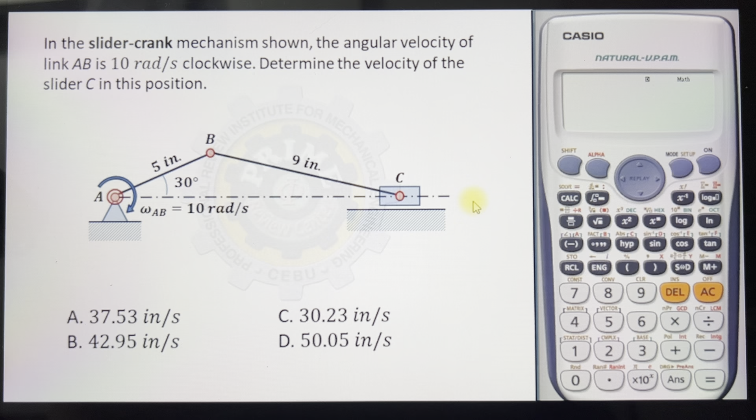Now there are numerous ways of solving velocities when it comes to mechanisms, but what we're studying now is one of the quickest and easiest ways of analyzing velocities: vector resolution and composition.

Let's say for example we have here a solid body, and let us consider 2 points within this body, point A and point B.

Now if for example this is a worded problem and the scalar and direction of velocity A is given, so we complete our data on velocity A. And if we also know the direction of velocity B - let's say this is the direction of velocity B - but the exact value of velocity B is not given. We only know its direction, but we don't know its scalar.

Now with the resolution and composition of vector velocities, we can compute the velocity of B. How? The first step is that you have to draw a line connecting these 2 points being considered.

This point that we're considering - so from point A, going to B. Now the second step is we do the composition.

How do we do that? We get the component of velocity A with respect to this line that we have created. How? From the tip of VA, we will draw a line perpendicular to line AB. So like this. And you'll see the portion of VA, its shadow on line AB, that's its component with the line AB.

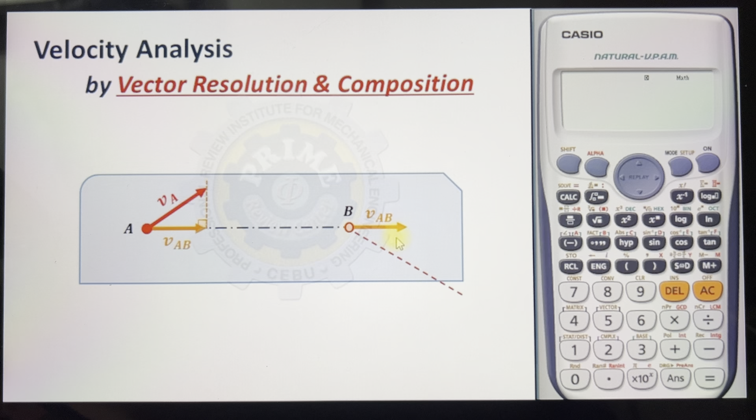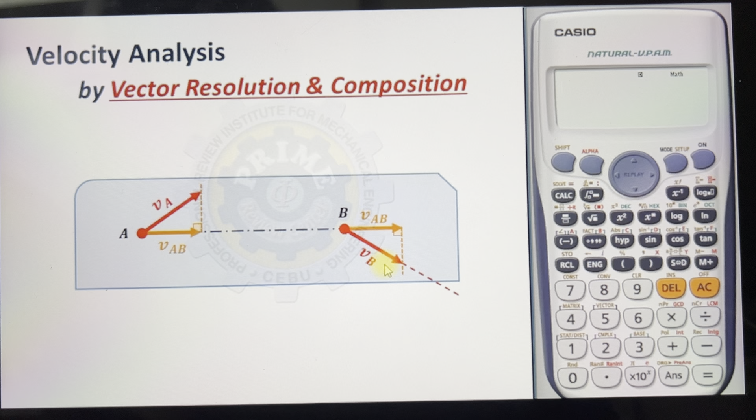Katulad ng ginawa natin kanina, gumawa tayo ng perpendicular line with respect sa line AB, ganun din dito. From the tip of VAB, gagawa tayo ng perpendicular line. Since we know the direction of velocity B, itong kulay pula, ang intersection ng perpendicular line at ng line of action ng velocity B, yun yung magiging length ng vector natin. So from point B papunta doon sa intersection, that's velocity B. At sa ganon, masosolve natin ito.

Okay, so let us apply. Balik tayo doon sa ating crank slider mechanism. Alamin muna natin gaano kabilis umiikot itong AB. Binanggit, that's 10 radian per second.

Ang motion mula dito sa link AB ay ipapasa niya dito kay link BC at saka ipapasa sa slider. Mahalagang malaman natin gaano kabilis itong velocity B. First things first, alamin na itong velocity B ay tangential velocity, at laging perpendicular ito sa radius nito. Kung umiikot siya with respect to this fixed axis A, naka-perpendicular siya doon.

At ito yung kanyang radius, 5 inches. Paano kinocompute ang velocity? Given angular velocity, we have discussed it already before sa mechanics, so we have angular velocity times radius. Both are given: angular velocity is 10 times the radius, 5 inches. Hindi na natin kailangan i-calculate yan. 10 times 5, that is 50 inches per second.

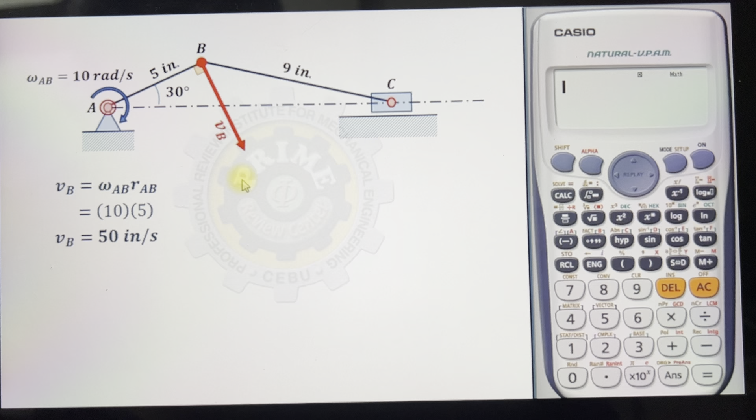So this is 50. Ngayon, para malaman natin velocity C, ang unang step sa ating method ng resolution and composition, una ay kailangan gumawa ng line connecting your points of consideration. Ang consideration natin dito ay point B and C, kasi dyan mangyayari yung transfer of motion. Hindi na pala natin kailangan gumawa ng line kasi meron nang line.

Ito na nga. Ang next step ay kailangan i-compute yung component ni velocity B dito sa line BC. Paano ginagawa yon? By drawing a perpendicular line from the tip of VB hanggang doon sa line BC. So ito yun, at mula dito sa point na ito papunta doon, that's VBC. At yan ang ililipat natin dito mamaya.

Pero alamin muna natin, ilan ba yung value nito? Kung mapapansin mo, meron tayong buong right triangle dito. Mahalagang malaman natin itong angle. Paano yun? By using geometry, magagawa tayo ng vertical line dito. If this is 30 degrees, this is also 30 degrees. Ginawa na natin ito sa static, so assume na nakuha na natin.

Pero puwede ring gamitin yung medyo mahabang solusyon ng geometry. Pero for shortcut, kung ano yung angle nito, yun din dyan. At kung ano yung angle na ito, tawagin natin theta. If this is theta, dito naman sa kanan, this is also theta. Kaya mahalagang malaman natin itong angle.

Paano yun? Let us consider the whole triangle, itong triangle na ito, at gamitin natin ang sine law. So 5 over the sine of the opposite angle equals 9 over sine ng opposite angle. 5 over sine theta, yun yung opposite niya, equals 9 over sine 30. I-type natin sa calculator: 5 over sine alpha x, equals alpha equals, then fraction, 9 over sine 30 degrees.

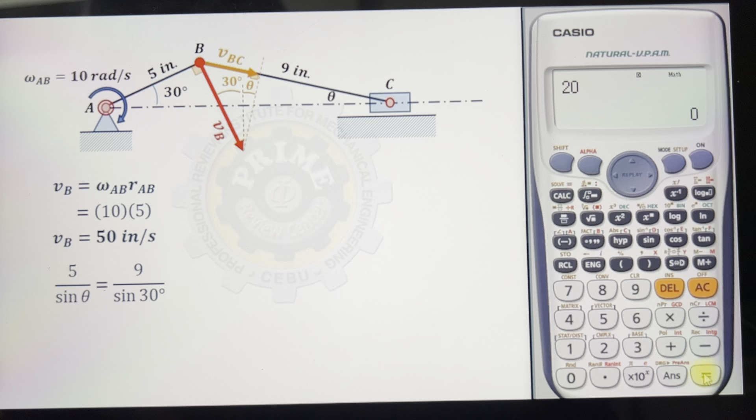Tapos shift solve. Siguro lagyan natin ng 20 para mapabilis, nagsusuggest tayo ng value sa calculator. So theta is equal to 16.13 degrees.

So if this is 16.13 degrees, we can now do trigonometry para masolve ang VBC, using sine. Yung VB times the sine of 30 plus theta, makukompute natin itong VBC. Direct substitution: 50 is VB, sine 30. Sa calculator: 50 sine of 30 degrees plus 16.13, press equals, we have 36.05 inches per second. So we now have VBC.

Itong VBC, dahil itong point B at point C ay nasa same body, kung yan ang value ng VBC dyan, ganyan din kabilis ang VBC sa point C, ganun din dito. Naililipat yun dyan. Ngayon, ang susunod na gagawin natin ay resolution.

Ito ang ginawa natin dito, composition. Dito po, resolution. Okay? Just like what we have done here, na gumawa tayo ng perpendicular line to line BC, ganun din po dito. From the tip of VBC, gagawa tayo ng perpendicular line.

Ayan. And since we know the direction of velocity C, alam na alam po natin ang direction ni velocity C. Itong horizontal, kasi slide po yan, magi-slide lang yan eh. So from point C up to the intersection ito, that's VC. Okay, so makikita na natin si VC, velocity C.

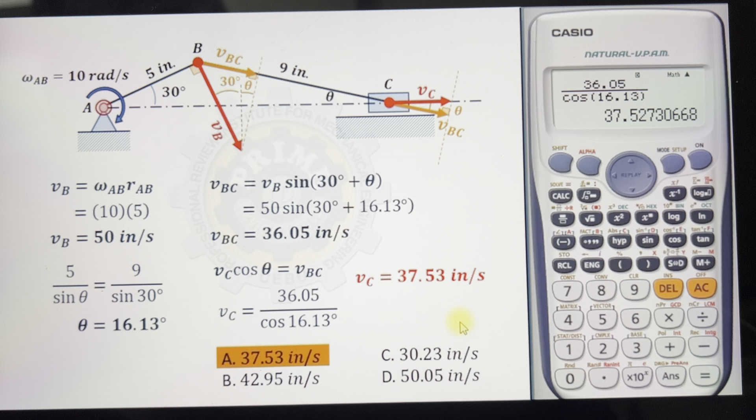I hope nasundan nyo po itong resolution and composition of vector velocities.

The velocity of slider B at the instant shown in the mechanism below is 12 feet per second. To the left, determine the direction and scalar of velocity A. Okay? Ito po nakikita nating mechanism ay isang link tapos dalawang slider.

No? So sabi ng problem, ito pong slider B ay mag-i-slide to the left papunta dito. At 12 FPS ang speed. So of course, by logic, ito pong velocity A ay pataas, upward. So sa choices, it's obvious, it's either C and D.

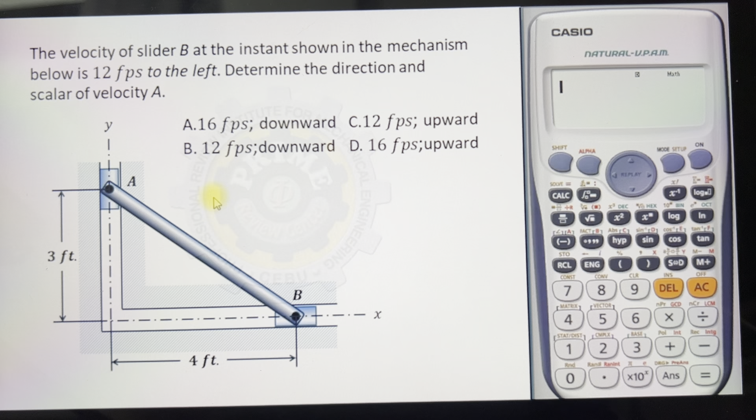Kaya lang, ano yung value? Yun ang gusto nating malaman, no? Paano po ito kino-compute? Okay? We have one of the ways po ng pagko-compute ng velocities in mechanisms, no?

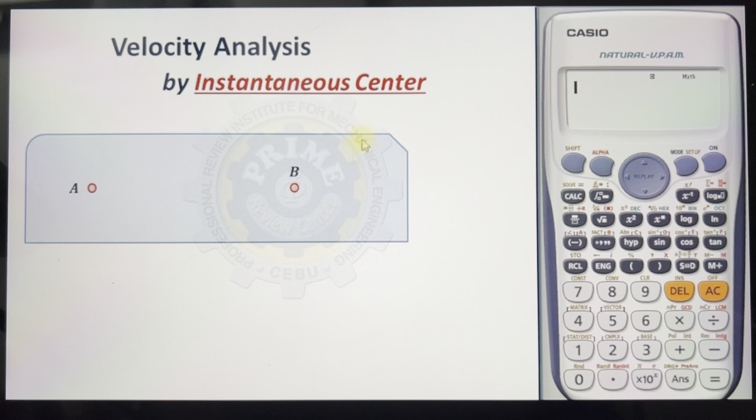When it comes to kinematics, ito pong paggamit ng instantaneous center or IC. Paano po yung ganito po, no? Since let us say for example, we have a body, no? A rigid body. And let us consider 2 points in this body, let us say point A and point B.

At sabihin po natin alam natin yung velocity A. It's a scalar value at saka direction. And then sabihin po natin alam din natin yung direction ni velocity B. Okay? But gusto natin malaman yung value niya. Paano po yun? Okay, ganito po.

Ang ginagawa natin, hinahanap natin yung instantaneous center o yung instant center. Okay? Ina-assume po kasi natin na ang isang body ay pag gumagalaw, kagaya po niyan, may posibilidad na umiikot po siya at a certain point. Paano yung ganito po, no?

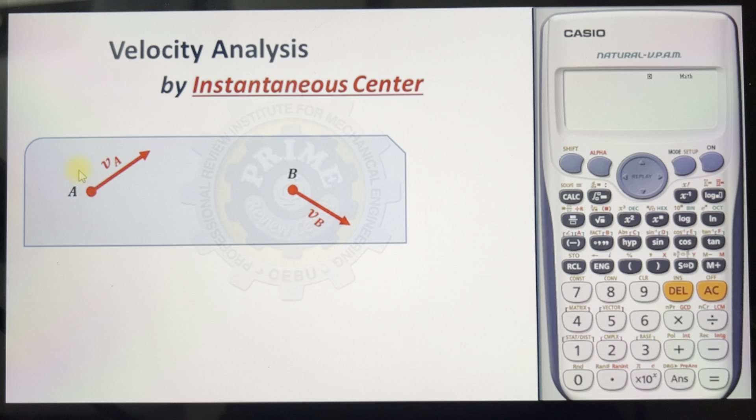Ang first step ay gagawin po, gagawa ka lang ng mga lines, mga perpendicular lines. Paano? Ganito. Halimbawa, velocity A. Magdodrawing ka ng perpendicular line. A line perpendicular to velocity A. Okay? Tapos habaan mo, extend mo. Ayan. Okay? Tapos itong velocity B, with this direction, gagawa ka naman po ng perpendicular line din.

A line perpendicular to the direction of VB. Ganito po. Ayan. Tapos extend mo rin. Ngayon, kung saan po sila mag-i-intersect, kagaya yan, dito po nag-intersect, okay, yung point na yan po yung tinatawag natin na instant center or instantaneous center IC.

Okay, ang ibig sabihin po kasi yan yung point kung saan itong buong body na to ay umiikot, no, seemingly turning around this point at this very instant lang. Kasi po, pagka gumalaw na yan, naiiba yung pwesto ng IC. Nagalaw din po yan. But kaya nga po tinatawag na instantaneous center. At that very instant lang. At this very instant. Okay.

Now, ano po yung meron? Ganito po, no? Sa pamamagitan ng pag-identify kung nasaan ang location ng instant center, napapadali po yung pagsosolve natin, napapaigsi, no? Yung pagsosolve ng velocities ng mga points na kinoconsider.

Okay, paano? Ganito, no? Alam natin na Kung halimbawa, ito po ay may angular speed, W. Alam po natin na ang pag-compute ng velocity ay WR, yung tangential velocity. Halimbawa, ang radius po nitong velocity ay from IC RA, tas ito ay RB. Para mo-compute yung VA, WRA. Yung W tina-times sa RA, W times radius, nakukuha mo yung velocity.

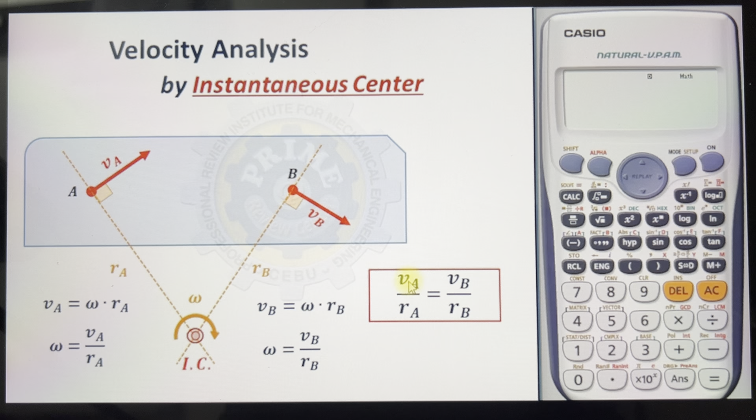They are turning at the same angular speed. We can equate this, no? Ibig sabihin, meron po tayong ganitong ratio and proportion. Pagka na-identify natin yung location ng instant center, sobrang dali dahil magre-ratio and proportion ka na lamang. Hindi na natin kakailanganin pa yung mga components, yung x component, y component ng mga velocities. Wala na, ratio and proportion na lang, ng velocities and radii. Okay, paano?

Ganito, balikan po natin yung problem kanina. Sabi ng problem, si slider B nag-i-slide to the left with a certain given speed. Of course, by logical reasoning, ito po aakyat pataas. Siyempre, imposible bumaba yan, kung bababa yan, mababali itong AB. So, pataas talaga yan, okay?

Now, we have to find first yung location ng instant center. Paano nakikita yung IC? Ganito, magdodrawing ka lang ng line perpendicular to the velocities. Halimbawa, itong velocity B, naka-horizontal, so ang perpendicular dyan vertical. Tapos habaan mo, extend mo. Tapos itong velocity A, since ito ay naka-vertical, ang naka-perpendicular dyan is a horizontal line. And then yung intersection ng mga lines na yan, ito yun. Yan ngayon yung instant center.

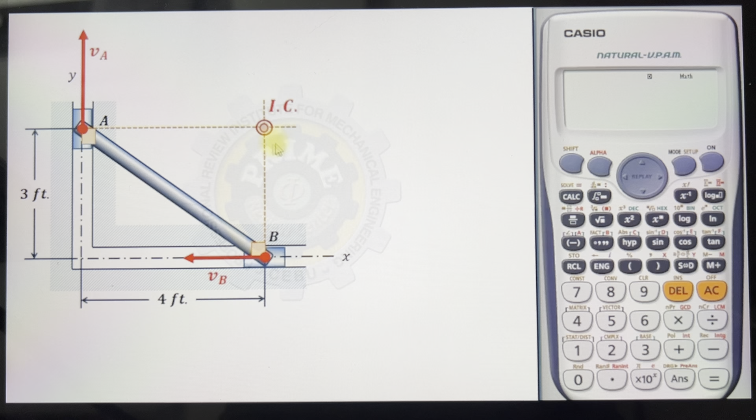Okay, remember, kapag may instant center na tayo, magre-ratio and proportion na lamang tayo. But dun sa ratio and proportion, mahalagang malaman po natin yung mga radii, mga radius. Halimbawa, itong si A, ang radius niya, distance yung from point A up to IC, ito po yung RA. Tapos yung RB naman ay distance from point B hanggang dun sa IC, this is RB. At ito nga pong IC, ina-assume natin na at this very instant, itong link AB, pati yung mga slider are turning, seemingly turning at this point, at this very instant, with this angular speed. Okay, so paano yung ratio proportion?

Ganito po. Velocity A over radius A equals velocity B over radius B. Okay, so given yung velocity B, 12 fps. How about radius B? Kung titingnan natin itong radius B, ito po ay 3 feet, kasing haba. So RB is 3 feet. For RA, ang haba po ni RA ay 4 feet. So RA equals 4 feet.

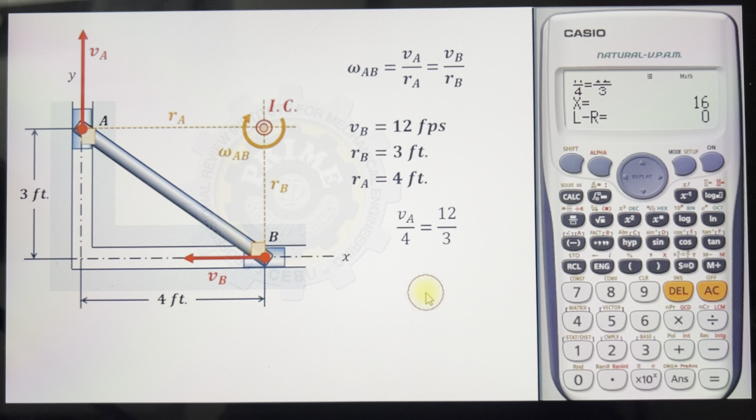Ayan, so okay na tayo. Direct sub natin dito, pwede na natin masolve si velocity A. So, velocity A is alpha x over 4, equals 12 over 3. By the way, pwede naman itong i-manual dahil madali lang, no? But sige, shift solve. Ang lalabas po, velocity A ay 16 fps. At sa choices ay letter D, upward. Ingatan po kasi mayroon ding letter A downward, but it's upward. Okay, letter D. So yan po, and I think ito po ang quickest way.

The easiest way din ng pagsosolve ng velocity, yung paghanap ng IC. Sa ibang libro, tinatawag yung instant center as the centro. Pero okay din po tawagin siya na instant center. I hope nasundan niyo po yun.

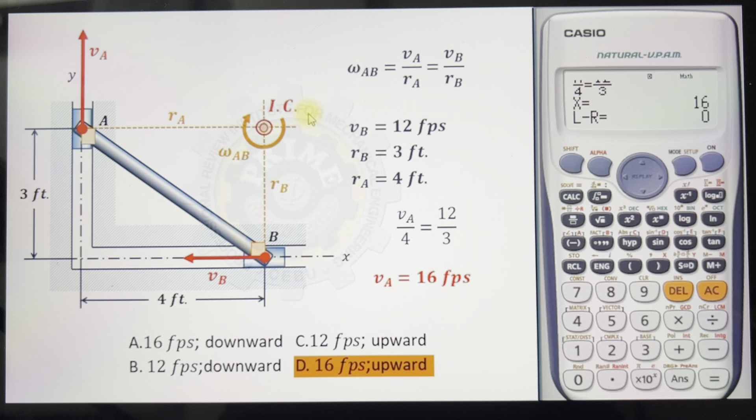Bukod po sa positioning and velocity, ang isa pa pong pinag-aaralan sa kinematics, when it comes to mechanisms, ay ito pong acceleration analysis. And meron po tayong tinatawag na tangential and normal acceleration. We have to consider these two types of acceleration para po makita natin yung total acceleration ng isang body.

Halimbawa, meron po tayo ditong link na nakapin dito sa isang fixed joint. Okay, and sabihin natin, let us consider a point in this body, point A. Now, let us say na itong body na to ay umiikot with respect to this axis at a certain angular speed and angular acceleration. Ibig sabihin, magkakaroon po ito ng acceleration itong si A. Now, if we want to compute for the acceleration of A, ang una pong acceleration dyan ay itong tangential acceleration. At yun po ay palaging perpendicular to the radius, or the distance ni A, yung line connecting point A at yung axis.

Lagi po yung naka-perpendicular. Paano po yung kinocompute? Para po yung tangential velocity. Kung sa velocity ay radius times W, dito naman po radius times alpha. So that's the tangential acceleration. Okay, tandaan, naka-perpendicular po yun dito sa radius. Now, aside from it, meron po tayong tinatawag na normal acceleration. What is normal acceleration? From the word normal, ibig sabihin ng normal, naka-perpendicular doon sa tangential.

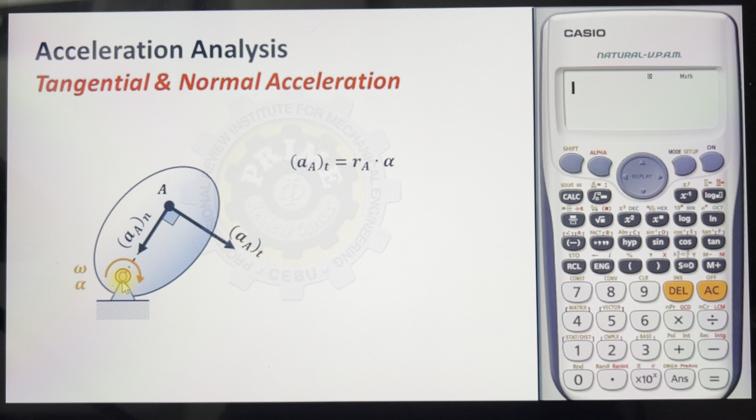Ang formula po niyan ay ito: radius times the square of the angular speed. Now considering these two accelerations, and by doing the resolution of vectors, ito po yung total acceleration or the resultant acceleration, we can call it resultant or simply the total acceleration A. Dahil ito ay parang triangle, we can do Pythagorean to compute for the scalar value ng acceleration A. So kunin natin yung tangential square plus yung normal acceleration square, then square root. Yun na po ang total acceleration.

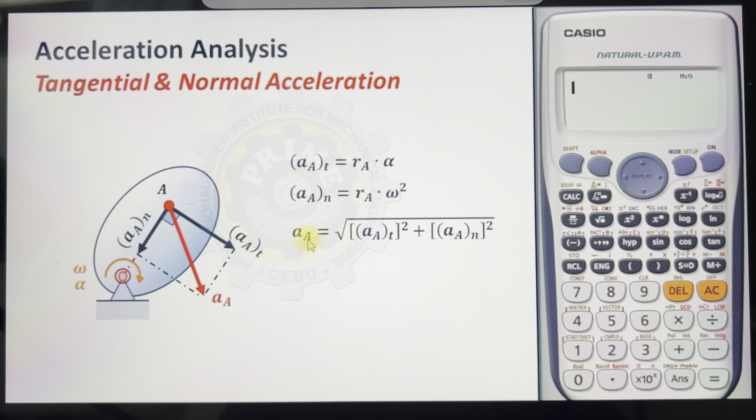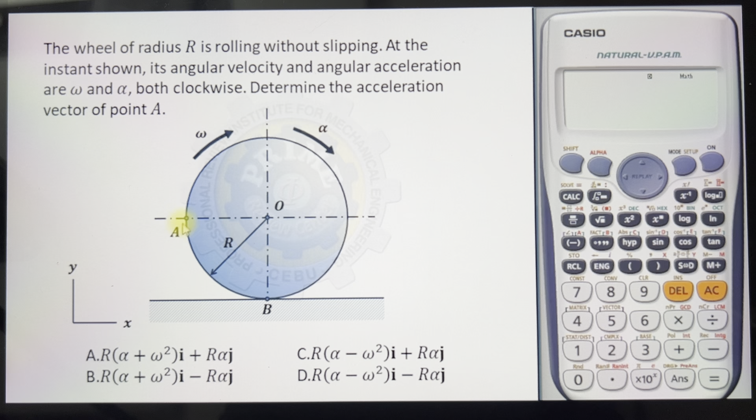Okay, kasi naka 2D tayo. So ang kailangan natin dito, malaman natin yung components ng acceleration ni A - yung acceleration ni A along y-axis at yung acceleration ni A along x-axis. So paano po yan? Ganito po, no?

Una sa lahat, dahil itong wheel natin ay may dalawang motion - rotation and translation. Remember, pag sinabi pong rolling, umiikot yun tapos gumagalaw din linear, tumatakbo pa kanan. So considering the rotation muna, itong si acceleration A, unang makikita natin dyan is the tangential one. Dahil nandito yung point A, at pag ganun yung ikot, tangential is always perpendicular to the radius, if this is the radius. Paano kino-compute yung tangential? Yun po ay radius times alpha or the angular acceleration.

Now, considering also yung rotation, alam natin kapag every time nagro-rotate ng isang object, lagi pong meron acceleration na ang direction ay towards the axis of rotation. And that is the normal acceleration. Lagi po yan, basta umiikot. Kahit nga mag-zero yung angular acceleration, basta may angular speed, lagi pong may normal acceleration. Basta umiikot, di po yan nawawala. At paano yung kino-compute? Yun ay radius times angular speed, ω square. Okay, so ito po yung consideration natin, rotation pa lang.

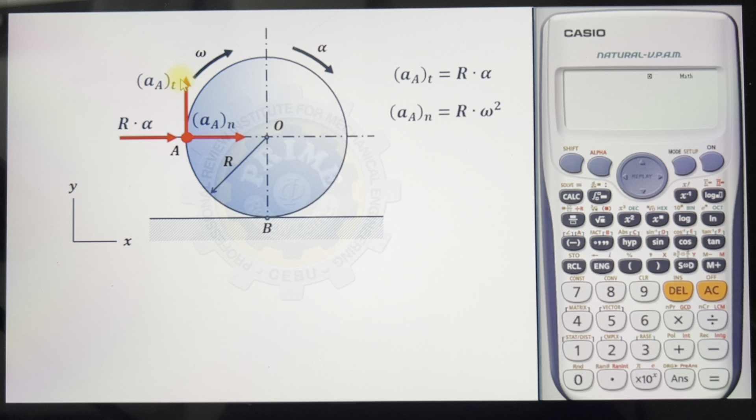So kung bubuuhin natin, yung mga acceleration along X, itatabi natin sa I. Yung along Y, itatabi natin sa J. Wala na pong K, I, J, K kasi hindi naman po tayo naka 3D. So sa along I or along X-axis, we have the normal acceleration and yung R alpha. So R alpha plus yung normal, that is R ω square. Ito po yun, okay, horizontally.

Plus yung vertical acceleration natin with point A, ito yun, yung tangential nagsosolo, wala na siyang kasamang iba. So that is R alpha. Now, we can factor out radius dito sa horizontal component na acceleration, so we have this: acceleration A is equal to R quantity alpha plus angular speed ω square, I, plus itong vertical component R alpha, J. And from choices, that is letter A.

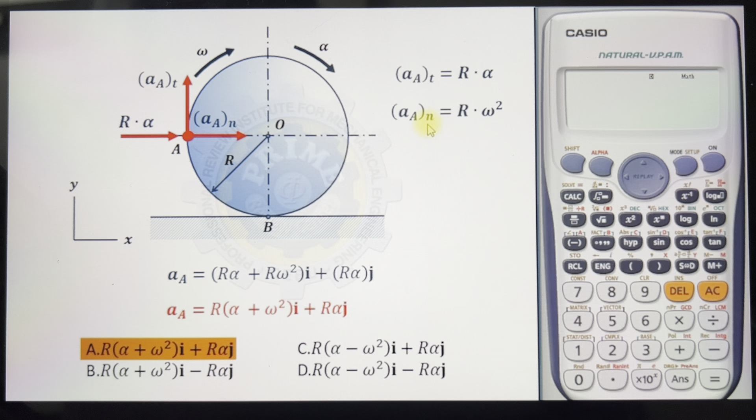Okay, I hope nasundan nyo po yan. Huwag nyo pong kakalimutan, in kinematics, dalawa po acceleration, may tangential at may normal. Yung normal, basta po umiikot, may angular speed. Kahit zero pa yung angular acceleration, basta may angular speed, ω, sigurado pong merong normal acceleration. I hope nasundan niyo po yon. Pagpalain po kayo ng Panginoon.